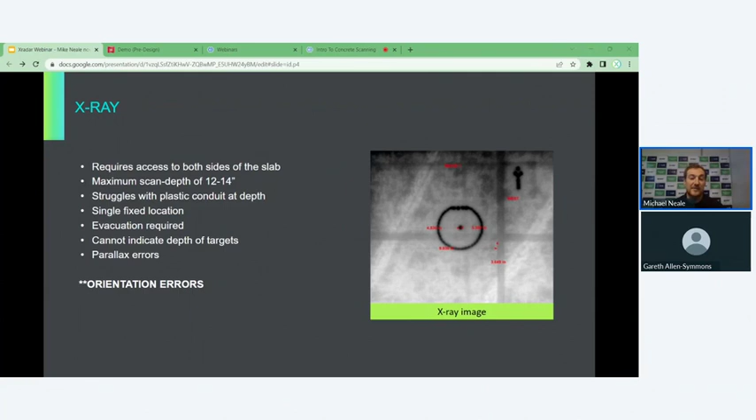In order to X-ray a slab, you need access to both sides of the slab. That isn't always possible, it completely eradicates slab on grade out of the picture. The max depth for imaging with X-ray is around 12 to 14 inches, and anything bigger than that, the exposure time is just too long. X-ray struggles with finding plastic conduits at depth, and it also has no concept of depth of targets, so you can see what's there, but you have no idea necessarily how deep they are.

One of the biggest problems with X-ray is obviously it's radioactive. You must evacuate everyone when you do it, which usually means doing the work at nighttime, or double the cost for the client essentially. The other large issue with it is it's a fixed location image. If you spend your money and spend your time taking your shot, and then there's a lot of conduits in the way and you can't put your hole there, you then have to just move and pick a new spot and start the process all again. So there's no real in-time live idea of what is going on until you look at the information.

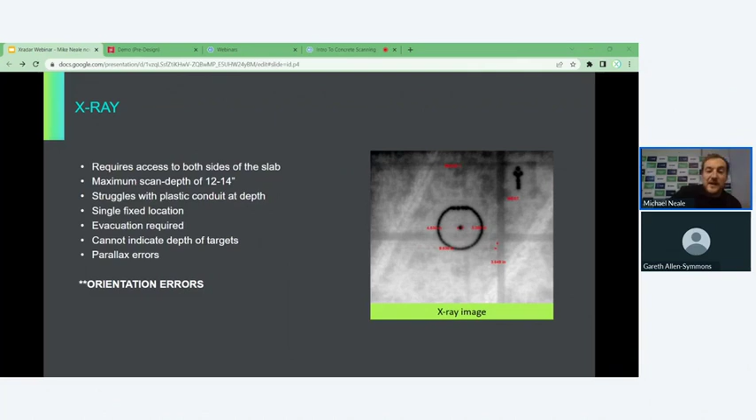Ground penetrating radar - now I'll get into how GPR works shortly, but regular GPR units are about in the industry today, and they can determine simple rebar patterns. GPR's main advantage over X-ray is that it collects data in real time, so there's no waiting for shots. You can see live if an area is busy or not busy, and in part you can then move to an area that isn't busy and spend your time working on that area.

The only problem with the current industry is these units have been dumbed down for mass production, essentially made to be a lot easier in order to sell these units to the general public. So these units cannot distinguish conduit from rebar, they cannot identify conduits hidden below rebar, they struggle to determine bar size, and they struggle with multiple layers of rebar.

The biggest issue with ground penetrating radar is it's an interpretive technology. The live data must be analyzed by an experienced and properly trained technician. So unfortunately, manufacturers have chosen to produce these really easy to use units with limited capabilities, essentially just trying to appeal to the mass market. The current industry error rate using these regular units is approximately 25%, so that would account for missing 1 in 4 conduits essentially.

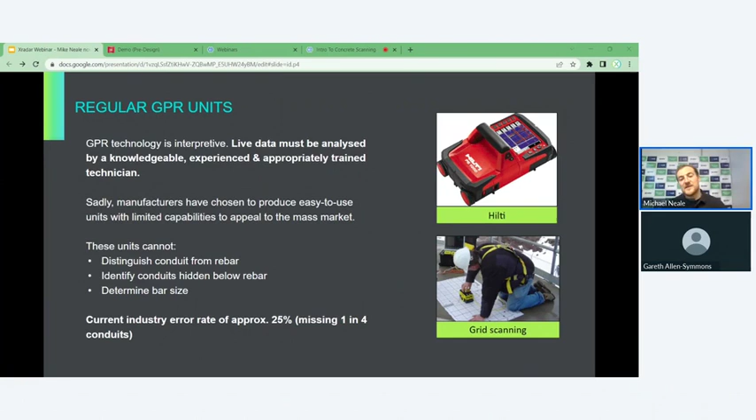Xradar is essentially as accurate as X-ray, but is as efficient and safe as GPR. Xradar utilizes ground penetrating radar, but with high-end units and high-frequency antennas. These antennas have been slightly modified and developed further in-house to maximize their potential, combined with rigorous training.

As a result, Xradar can map out complex rebar maps. It can determine targets hidden under other targets, determine slab thickenings, layer changes, and identify material changes, for example plastic versus metal, i.e. a conduit versus a rebar. Target type can be determined even if they're the same material, such as post-tension cables versus rebar. Diameter of targets can be achieved to a certain extent as well. The current industry success rate using Xradar is 99.7%.

So, how does GPR work? And this is why we're here today.

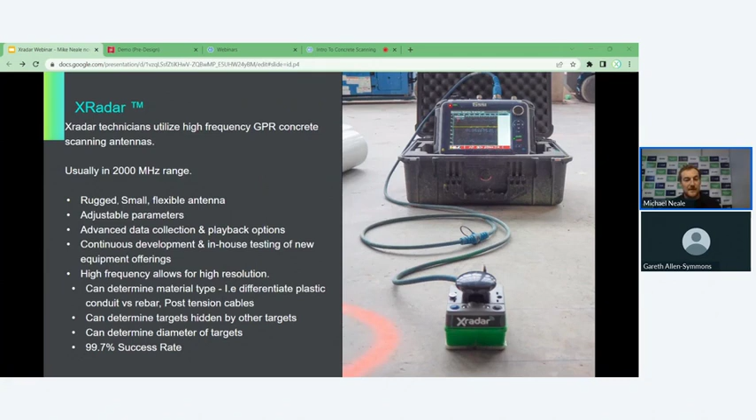There are different setups depending on what equipment you use, but there's always a screen and there's always an antenna. The antenna will contain a survey wheel which has an encoder in it, and this is essentially how the antenna knows its position on the surface.

The first and fundamental thing to understand about radar is that it will travel through different materials at different speeds. This is the basis of how GPR works. Radar pulses emit from the antenna into the concrete, and when they hit something with a change of density or changing dielectric properties, it will rebound and be received by the antenna. The greater the contrast between the properties of the two materials, the greater the reflection.

For example, metal inside concrete are very two contrasting materials, so it's very, very easy to see. The reflection is very strong, and the amplitude of that reflection is very high. The difference between plastic and concrete is still very contrasting, but it's a little bit closer than metal and concrete. Therefore, the reflection is a little bit weaker, but still prominent.

How something reflects is a direct product of whether the radar slows down or speeds up upon hitting that new material. One thing to really take into account is conductivity, which plays a huge part. The more conductive a material is, the slower the radar will travel. Metal is obviously very conductive, therefore radar will not travel through it at all, and it fully reflects from metal, which is in turn why metal is so easy to see.

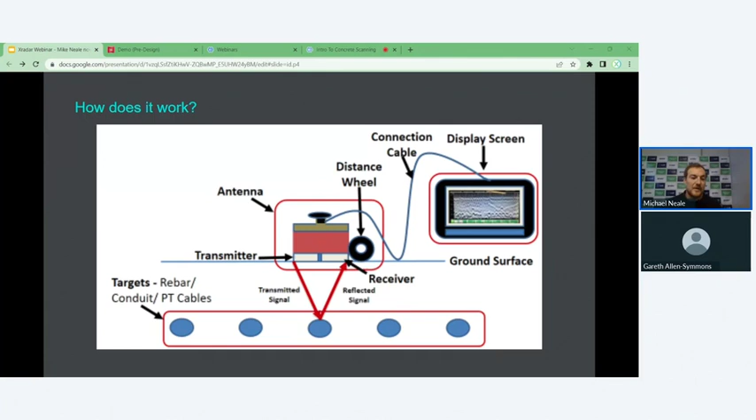This is a quick diagram of how an antenna would move across a surface. As it moves across, it starts to pick up targets in the surface. This is a piece of rebar, and it creates a hyperbola. The way it figures out how deep it is, is essentially the time it takes for the radar wave to travel down, hit the target, and come back.

The only factor the machine doesn't know is the speed at which it's going to travel, because as we suggested earlier, it travels at different speeds through different materials. Therefore, calibration is crucial. By telling the machine what velocity the radar will travel, i.e. what material you're scanning, you can get accurate depth to targets. This is a really important factor that needs to be understood.

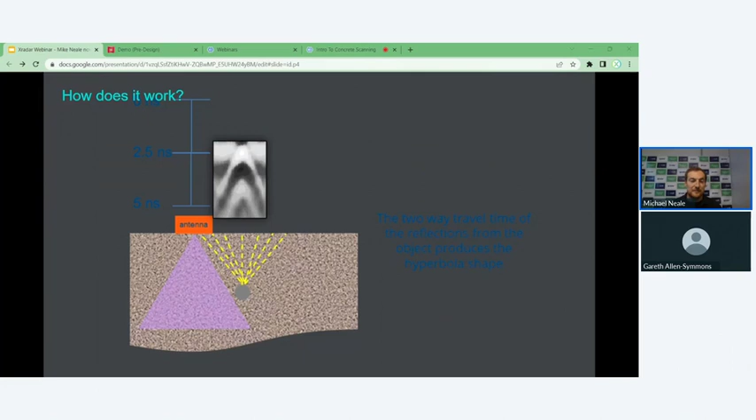So what does it look like? This is a typical radargram, and a very, very simple suspended slab. You've got 2 layers of rebar, and what we see is a profile view of the slab. So this is the surface. As you run across the slab with your antenna, you see these hyperbolas in the slab.

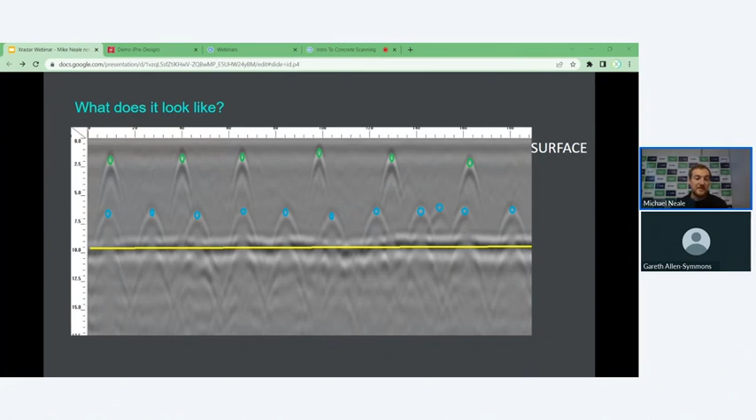The green is rebar at the top of the slab, top rebar. Blue is rebar at the bottom of the slab. Obviously, you can see the bottom rebar is deeper than the top rebar. The yellow line is essentially the bottom of the slab. The radar has traveled through the slab and hit the air, and it's actually sped up, because it travels through air quicker than it travels through anything else. So you get this nice consistent line at the bottom, and that indicates the bottom of the slab. In this case, approximately 10 inches, something like that.

This one here has been mislabeled, and it's actually a conduit. Given the spacing of the bottom rebar, to me, in my experience, I would say that is an electrical conduit running through the slab. So it's very easy to get misled sometimes, and why you need to understand what you're looking at.

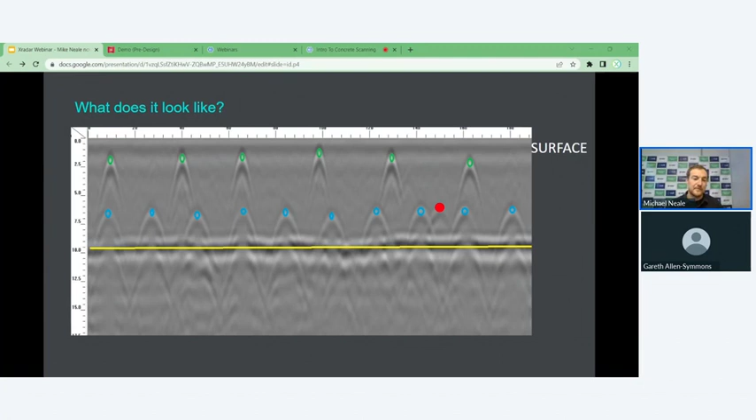This is a lot more complicated image. It'd be very nice if every image was like this, but it's not. Here you've got multiple layers of rebar. I can't see the bottom of the slab at all. Below the rebar, you've got post-tension cables running through the middle of the slab.

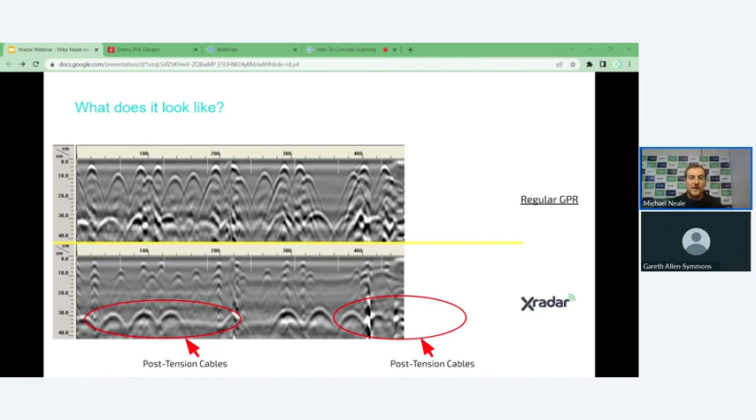Here's a quick example of slab on grade. Obviously slab on grade means slab on the ground. There's no rebar in this at all. The idea is the ground is holding it up. So again, we've got our bottom of the slab line. However, it's pretty uneven, not as straight as a suspended slab because the ground is not perfectly straight. You've got gravel and subgrade below.

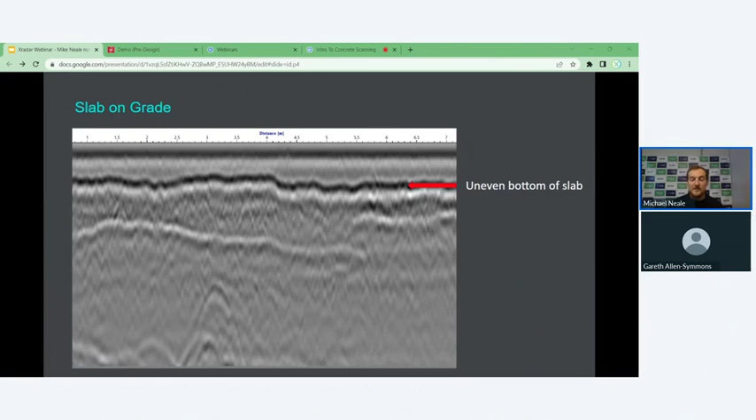So you get an uneven bottom of the slab. You also get reflections from the soil and the subgrade. It's not as clear. The radar is not heading into air, it's now heading into the ground, so we're still imaging the ground. And you can even make out pipes below the slab - this is a plastic plumbing pipe below the slab.

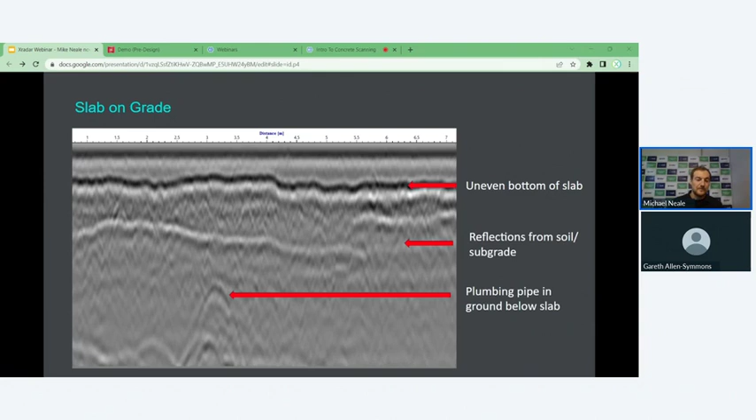So what are the issues in the industry? Or the areas of concern?

Choice of equipment. Concrete scanning is an unregulated industry. Anyone can go out and buy a machine, but do they know what they're doing, essentially? And as I suggested earlier, the manufacturers have chosen to dumb down these units for the mass market. They want to sell as many of these products as they can. And in reality, GPR's greatest strength is when you have a highly trained operator who can interpret the complex data it provides.

If you look at the medical industry, for example, you wouldn't have a machine tell you whether you've broken your arm or not from the X-ray. You'd have a trained professional looking at the X-ray and making those judgments, understanding that it's not just a black or white situation.

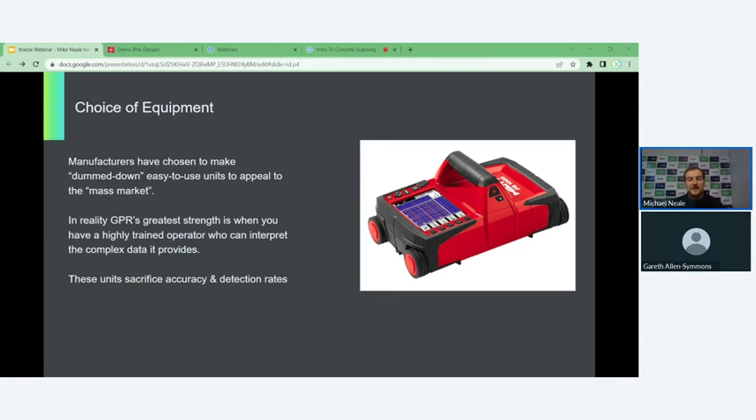The other monumental issue with the industry is the lack of training. Because it's unregulated, the current standard is a 2-day course provided by an equipment manufacturer, essentially, which is nowhere near enough. Understanding ground penetrating radar requires a lot of experience, a lot of training. Not only must you learn about geophysics and the science behind how the equipment and radar works, but the scanning environment is crucial. For example, you may be a geophysics PhD, but if you know nothing about structural slabs or concrete, then you'll be completely lost.

Xradar's training scheme takes around 9 months to a year before someone is considered qualified to go out on their own. And then that is essentially the start. From there on, you progress with more and more complex jobs, more complex slabs, and it's only ever evolving in experience.

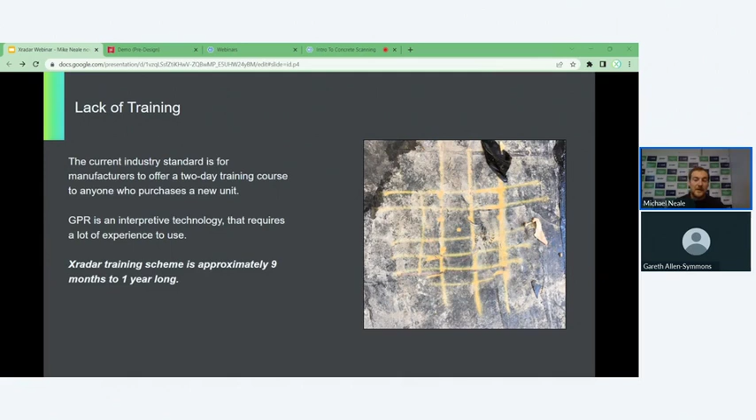Another byproduct of the unregulated industry is essentially the lack of accountability. There's a huge tendency to blame the equipment when things go wrong. Contractor comes in, they scan, they hit a conduit. 'This useless piece of equipment, it should tell me where everything is.' And that's completely misunderstanding the point. You need to have people who are experienced in order to understand what you're looking at. People are very easy to wash their hands of responsibility.

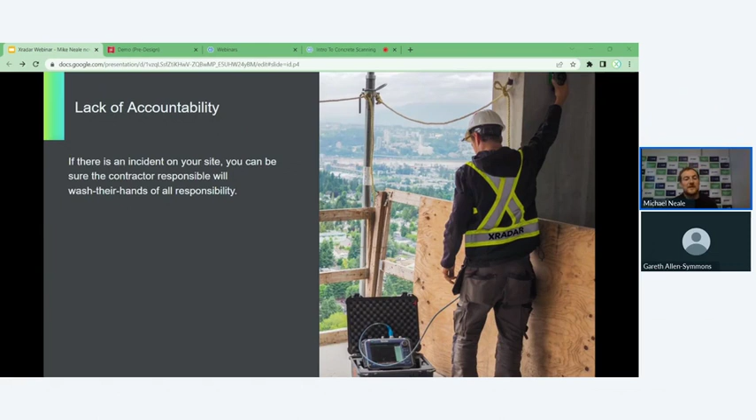As you all may know, assuming a lot of you are in the Canadian construction industry, everyone in the construction industry is in a big rush. It moves very fast. Everyone wants to finish their projects or their part of the project, and there's a lot of corner cutting sometimes. These quotes are stuff I hear regularly on a daily basis. A lot of people assume they know - 'there should be nothing there.' In reality, they don't know.

Post-tension is an increasingly big problem. Given the Vancouver area being in a seismic region, buildings are increasingly more reinforced, increasingly more stringent on what you can and can't cut in terms of structural rebar. Post-tension cables should never be cut. And there's more and more post-tension buildings in Vancouver than I've ever seen. It's becoming a big issue.

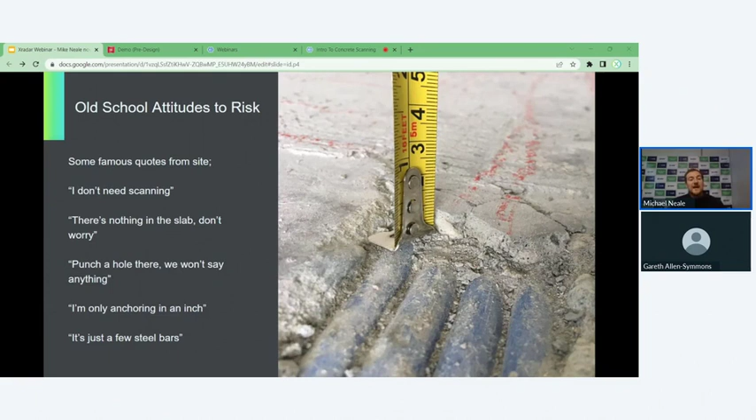This photo here actually shows some post-tension cables less than half an inch from the surface of the concrete. So when you're anchoring inserts into a slab, huge issue. There's a lack of acceptance of avoiding rebar. A lot of people, they want to get their job done, they want to just core a hole. This has 6 35mm bars without structural approval.

The building may not fall down, but if this happens consecutively over the next 10 years, various TIs, various kinds of revamps of the building, that integrity gets lost pretty quickly. And so it's an increasingly big problem.

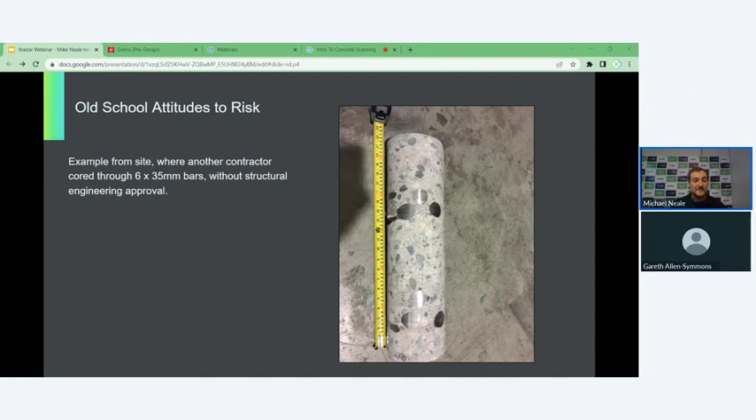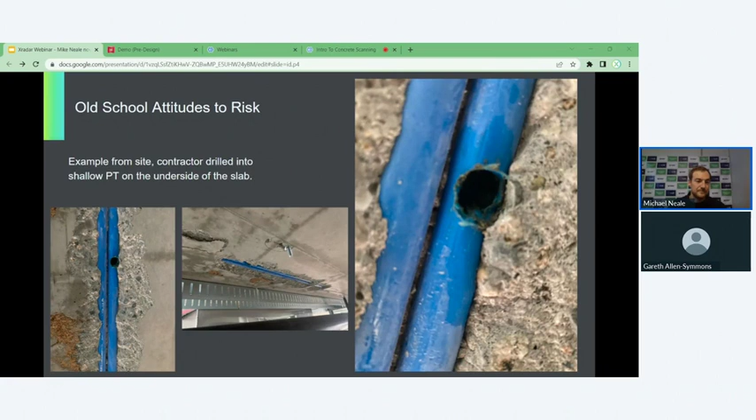So training is absolutely crucial. We focus a lot of our time on training technicians and helping them understand the science behind it and the environment they're scanning.

They go through, as I said earlier, it's up to a year usually before they're graduated, and this involves theory. It involves scanning on site, shadowing people, gaining that experience, and also auditing and testing them, making sure they're making the right decisions. Honestly, the hardest bit is the decision making. You may be able to scan it, you may be able to see everything there, but it's deciding what to do or what decision to make in that situation. And that really does take time.

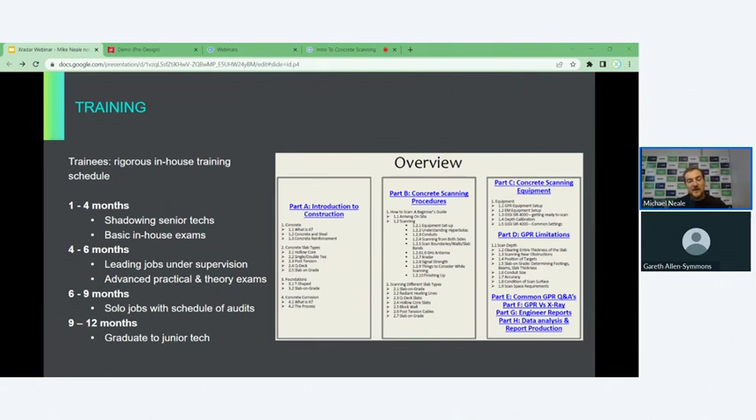Now, nothing is without limitations. And the biggest problem is we understand the limitations, but not necessarily do the clients understand the limitations. They expect you to come and just magically be able to see everything that's there. And it's not always the case.

So depth is obviously a huge limitation. Radar attenuates at depth, so radar essentially loses energy. Depth of penetration depends on the age of the slab and what's in it. As we talked about earlier, conductivity is huge, so a new slab is a wetter slab, which is more conductive, so radar penetration is a lot poorer. Typically, we can scan between depths of 12 to 16 inches from one side. Therefore, scanning from both sides, you can gain up to 24 to 32 inches. And again, it depends on the age of the slab - the older the slab, the better and further you will see.

Tight rebar is still a huge problem. As we said earlier, radar does not travel through metal. Even with enhanced Xradar technologies, we're able to see past certain things and see things hiding below. However, when the rebar is really, really densely packed together, it creates a shield, and it's almost like someone has closed the blinds. Not much of that light is getting through, and you're unable to see what's below.

Now, in my experience, everyone wants to core holes next to columns. It's a nice, tidy place to hide a pipe, but it's also the place with the most rebar. Same next to slab bands, the most rebar. Don't forget, you can scan both sides of a slab, and often this is the approach that's needed in order to clear these busy locations.

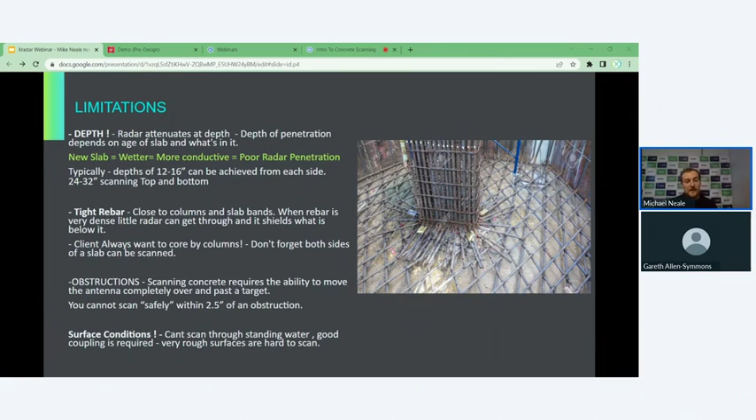It's all about being prepared before you go. This is something we've kind of been doing on the side - a GIS database of every building we've ever been to. Within those buildings, we create records of what we found. For example, level 25 was a 10-inch slab, the rebar was spaced at this, it was 4 inches deep, etc. By doing this, you have this ever-evolving record of everything you've ever done, and you're fully prepared going to sites.

I'll check this before I go to every site, and I'll know, okay, I know there's post tension in this building. I may not have seen it myself, but someone else was here - they know on level 5 there was post tension. It just sets you up for that extra layer of knowledge before you go somewhere.

Accuracy: training and equipment and preparation equals accuracy. The error rate currently with Xradar is less than 0.03%. This is accounted from years of statistics we have kept, based on essentially the amount of scanning we've done versus the amount of error there is. There's a 25% error using regular GPR.

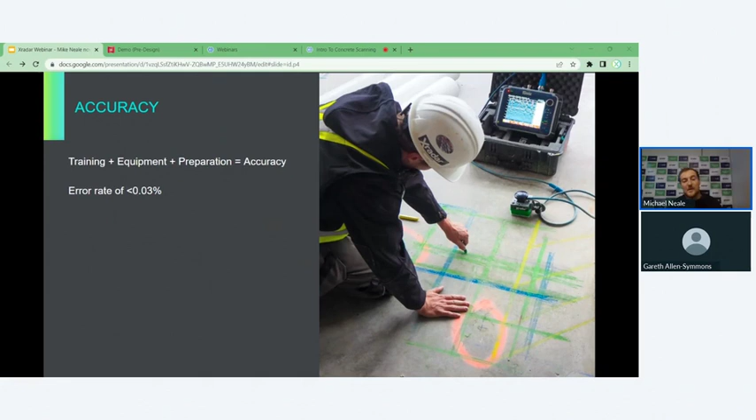The remaining error is essentially down to human error. You can never really eradicate human error. If someone's having a bad day, they forget to do something, these sort of things do pop up. So that is why there is a remaining 0.03%.

Scanning comparison. Let's take a little look. This is a classic show up to site. Someone has scanned before, just a bunch of lines on a slab that doesn't mean anything.

Whereas on the right, you have the top rebar marked in green, the bottom rebar marked in blue, electrical conduits running through the slab in red, and a boundary in yellow. Now, the boundary is actually a really important point because it differentiates what has and hasn't been scanned, which in this situation seems fairly obvious.

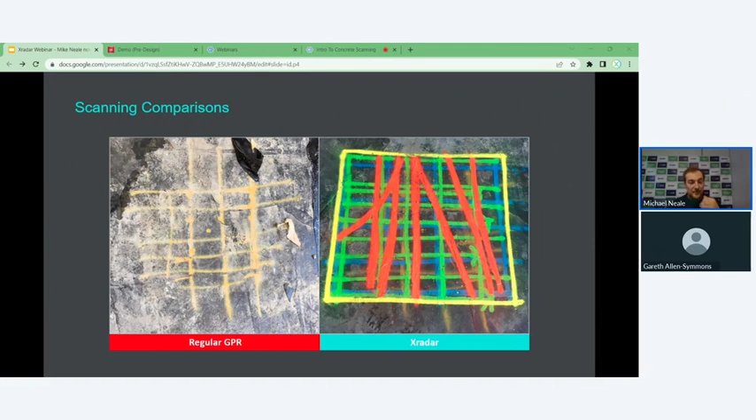But if you have a scan where there isn't much rebar, how do you know what the extent of what has been scanned and what hasn't been scanned? Another situation here, people were able to core a hole, avoiding the electrical conduit running through, avoiding the rebar.

Another situation. This person attempted to mark conduits in, but they were in the wrong place. There's only one layer of rebar marked, but in reality, there's 2 layers of rebar, pretty dense rebar in that regard. A couple of electrical conduits running through there.

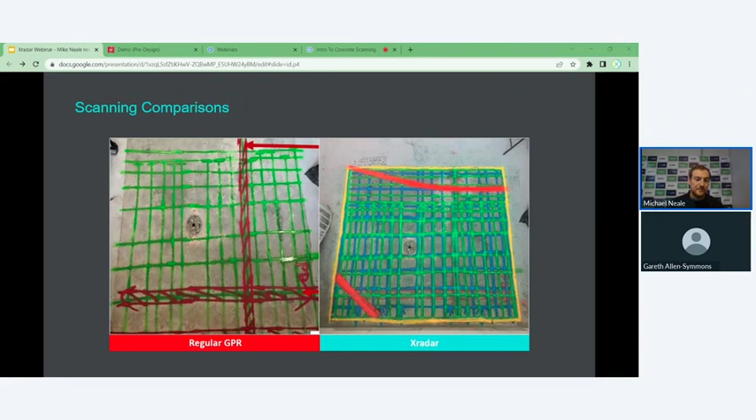Sometimes when it's that heavy, people give up and they say, too hard to X-ray, too hard to scan. And for the most part, most locations can be cleared. If you know what you're doing, you have the right equipment and the right experience, you can scan most locations.

So let's have a look at the data. Here's the same shot, the same profile. You can see a lot of rebar at the top. And using Xradar, you're actually able to see those hidden targets below the rebar, a lot easier than if you're using regular GPR.

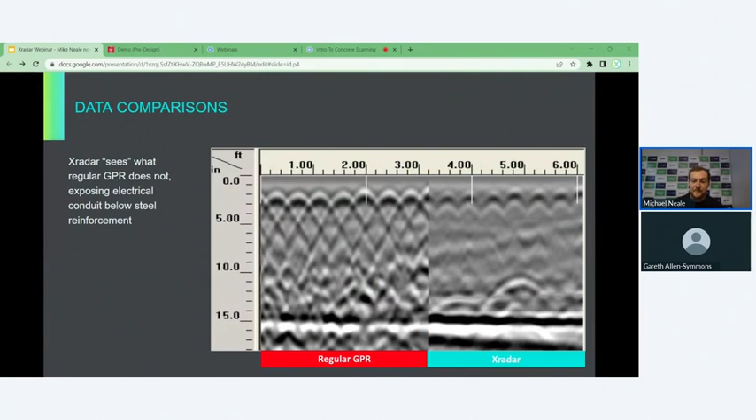Now, phase change is a really, really important factor. When I talk about phase change, what I mean is the radar either slowing down or speeding up. So based on the radar slowing down or speeding up, I know what kind of material that is. I know that radar is going to slow down when it hits metal. It's going to produce a metal reflection.

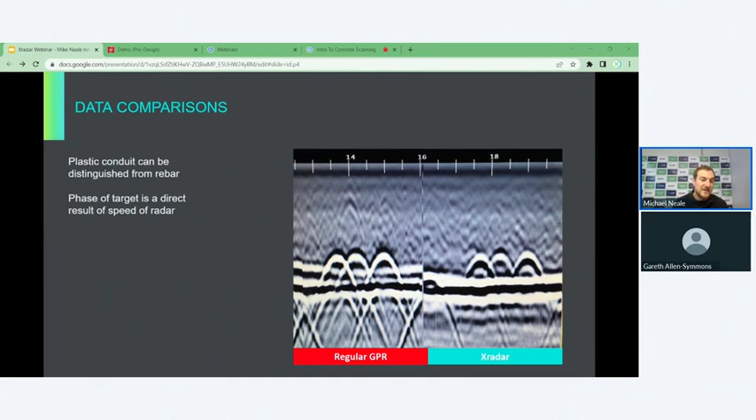When it hits a plastic conduit, for example, it's going to speed up. And that actually creates a different type of reflection, and in turn helps you an understanding of what you're looking at.

Now, to the untrained eye, these two images look exactly the same. On the right, I know the middle target is a conduit based on the phase change. And it takes a while to get to that point, but once you see it, you can't unsee it.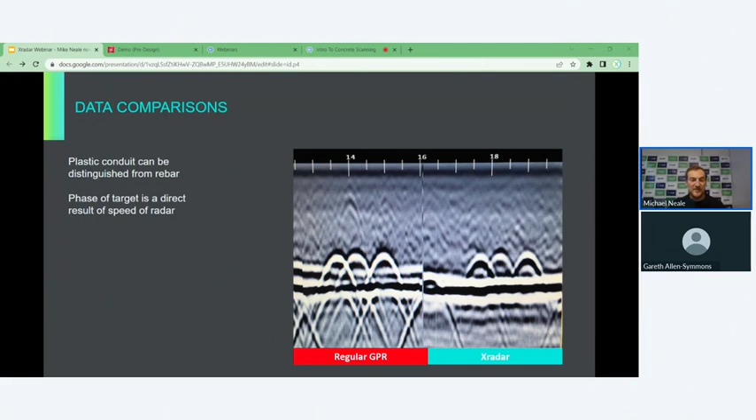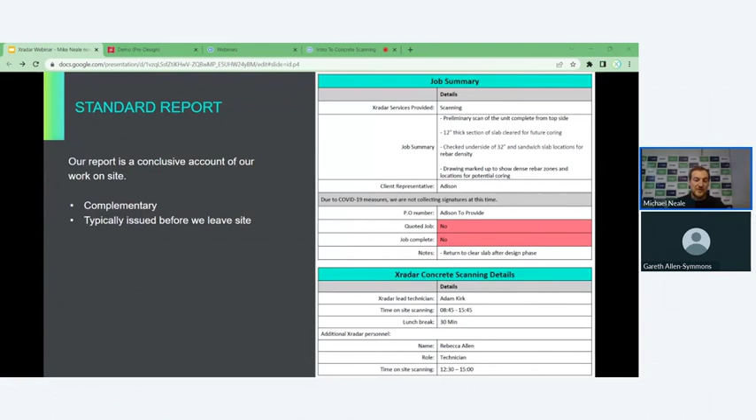Reporting. It's all very well doing a nice scan, but you've really got to present the report to a client. And the way we do that is we essentially send out a pretty instant report that contains details of everything we've done: description of the job, legend, images of each scan, the depth to each of the targets, often a floor plan that denotes the actual location of the scans within the floor plan.

The reason for doing this is if an engineer needs to approve a core, if they can see the scan and the orientation of the scan, and they can see where it is on the drawing, they can determine if and what rebar may or may not be cut in this situation. And they can actually do this from their desk. They don't necessarily need to be there because they have the layout, they know the orientation, they know what they can and can't cut.

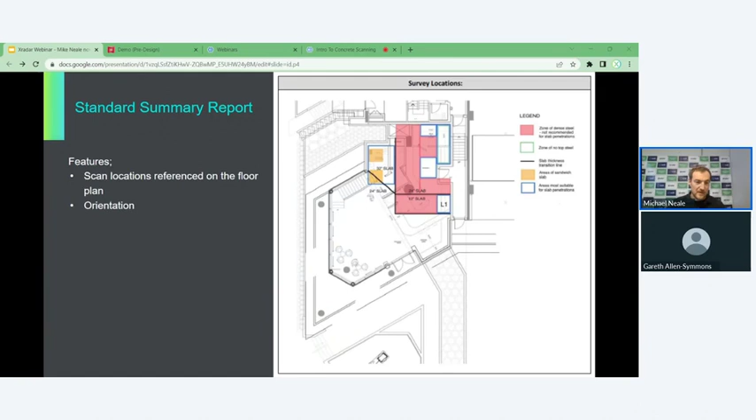Location of the scan along with depth, any limitations that are associated with this slab. So all the information is right there.

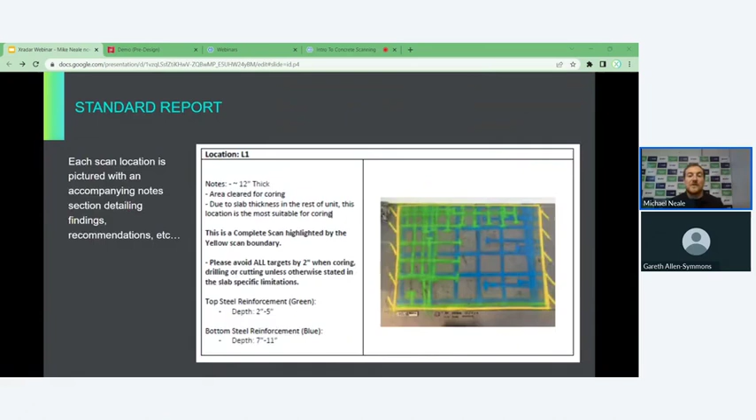What do you do if there's no structural drawings for a building? Well, you can create them. By scanning various sections of walls or slabs, you can find the structural rebar, the orientation of it, the layout, the spacing, the diameter of the rebar, and then by creating a CAD report of this, you can present this to an engineer or a building owner, and an engineer can then use it to determine calculations, essentially.

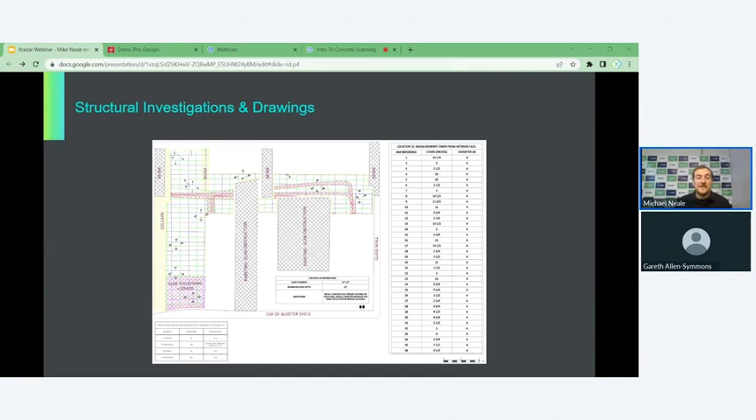So if you don't have any structural drawings, which a lot of these buildings don't, they're old buildings, drawings are bad, or drawings are missing, then create your own. And this is something we're able to do by first scanning and then producing a CAD drawing of where everything is.

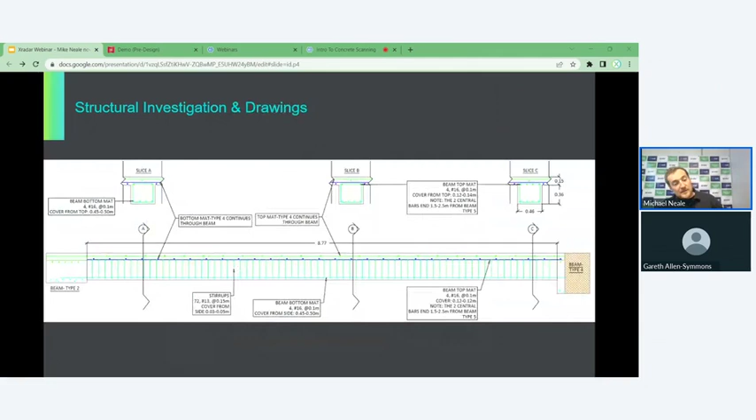And lastly, other areas of expertise. I'm just going to quickly dive into some other areas that we can hit, and feel free to ask questions about these at the end.

Corrosion mapping is a really, really useful tool. Concrete structures corrode over time, and this kind of mapping is extremely useful because it can be proactive and not reactive. You might determine a bridge is corroded in one area and not another, meaning you repair just that area and don't spend a ton of money repairing the whole bridge. This is something we've had great success with.

Structural investigations I kind of touched on, but the ability to create a structural drawing, if it doesn't exist, lets an engineer come up with load bearing capacities on something, by giving them this information without any kind of destructive work. Crack and void detection is an increasingly big problem.

There are two types of voids that seem to exist. One is sub-slab voids—voids below slab on grade, often in warehouses and places like that. I've noticed a lot of this happening in areas south of the Lower Mainland. If the ground starts to subside, you end up with an air gap between the slab and the ground. The slab can't support itself anymore, which causes it to sink and crack, and it becomes a big problem. By doing a void survey, you can identify areas where these voids exist, and then fill them.

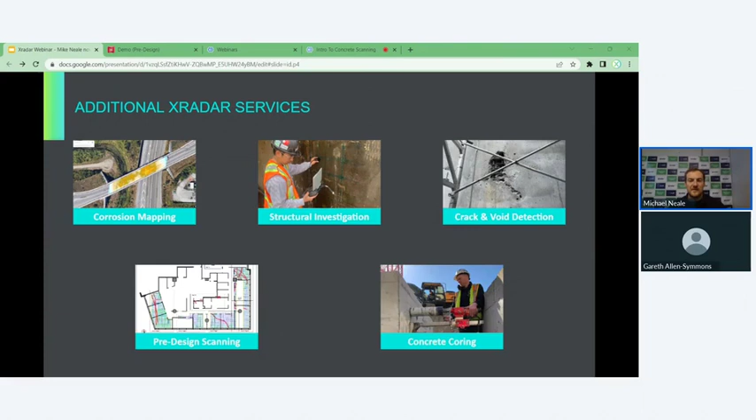Lastly, I want to touch on something we've coined pre-design scanning. People spend a lot of money designing spaces, and then when they get there and start scanning, they find they can't go where they need to go—there are too many conduits in the way. So they spend more time and money redesigning, and then they get back and still can't go there either. So the idea is: why not scan the space first, produce a CAD drawing of where everything exists, and then design your room based on that. In the long run, you save money doing it this way.

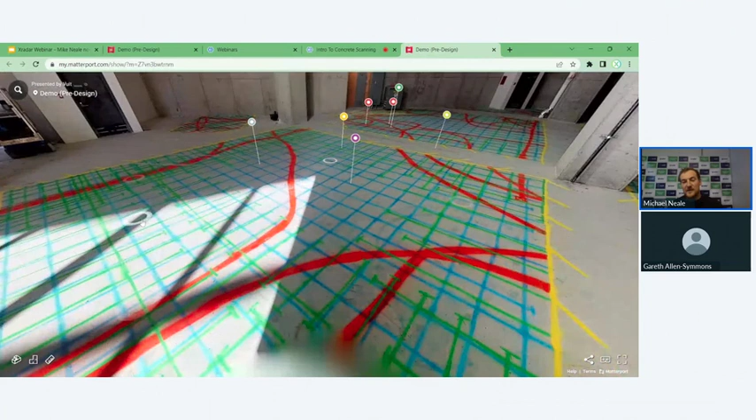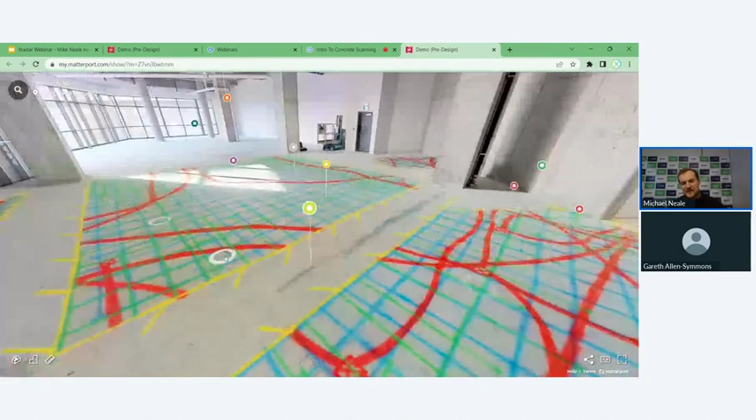This is a 3D walkthrough of a site where we did this. You can see the top rebar in green, the bottom rebar in blue, and electrical cables running through the slab in red. These are slab bands running between the columns—you don't want to go through the slab bands, as that's three times the thickness of the regular slab. That's one thing that massively gets overlooked too—just the location of the slab bands. People spend all this time designing and don't think there might be a slab band in the way. So it's a big problem.

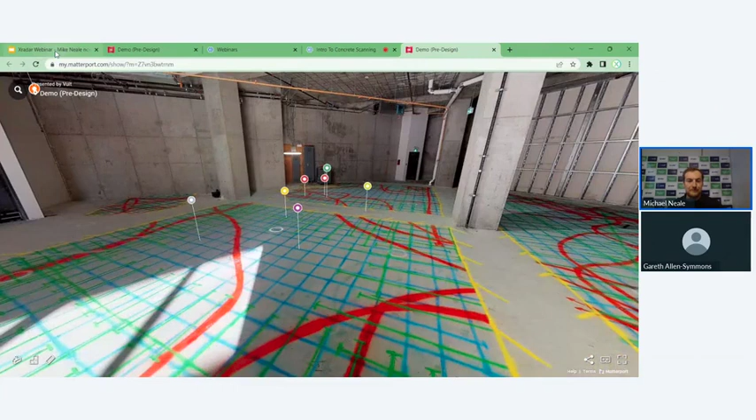Lastly, concrete coring is something we offer, in order to cut core holes through concrete, and it goes hand in hand with the concrete scanning. That's mostly what I wanted to say. If you guys have any questions, Gareth here will answer them and send them to me, and I'll answer them for you online. Thanks for listening.